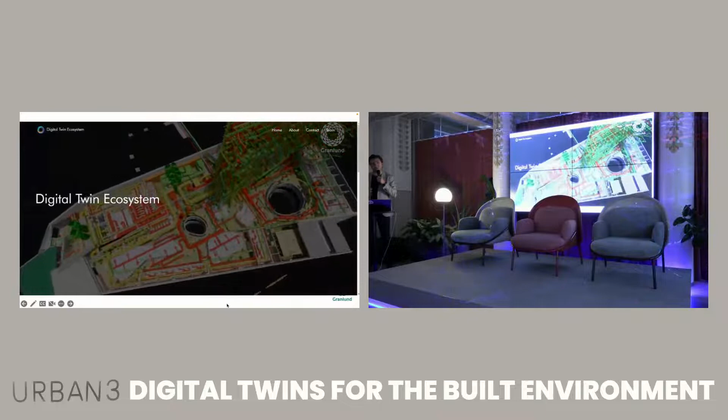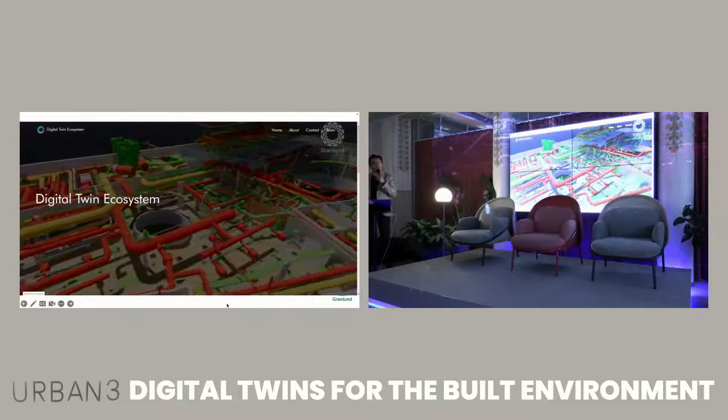I'm going to show you a video. Here we started trying to understand what digital twins are about. The industry is quite complex, so we took an approach to understand what kind of users there are and what kind of digital twins we should develop. For this, we planned different kinds of use cases, and with that we developed different applications that suit different kinds of users. I'm going to show you some of these applications, but try to focus on what the idea is.

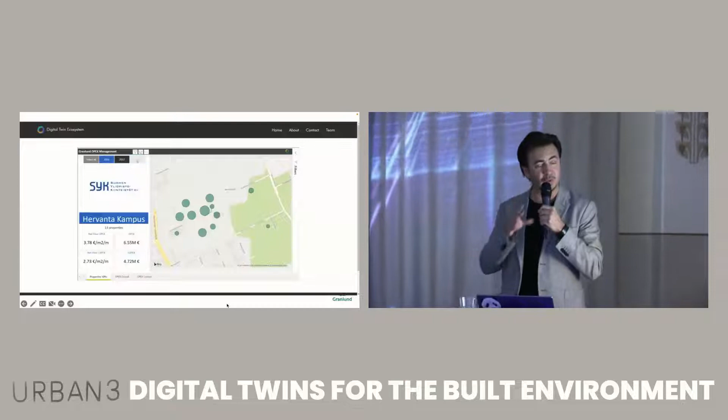I'm going to start with this portfolio benchmarking, and this is to have a big picture of why we are needing digital twins and what kind of digital twins we want to use. This is to have an overall view of the portfolio of a campus, for example Hervanta campus, and we focus especially on operational costs and capital costs. We wanted to understand on a bigger picture what kind of buildings need to reduce those costs, and we compare that to a specific benchmark. This benchmark allowed us to know and understand what is the digital twin we need and why do we want to develop that.

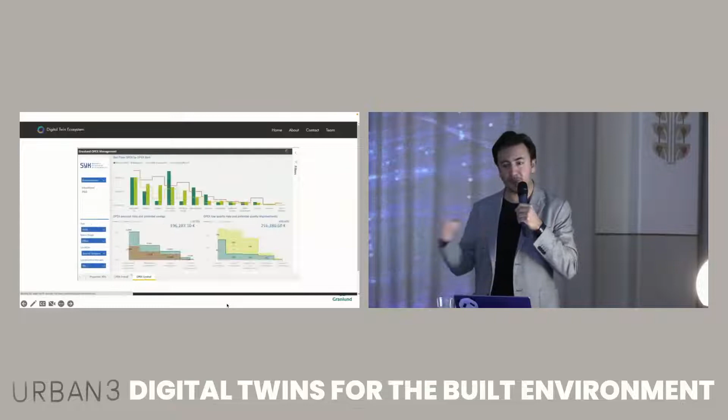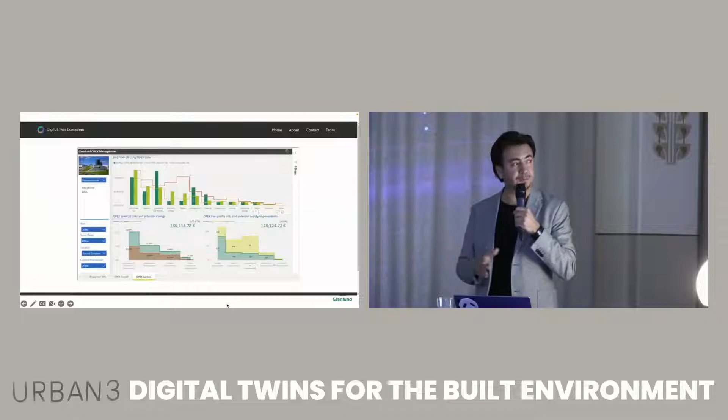Then we went more in detail about the operational costs, and here you can see the different cost items in operational expenses. In this specific project we focused on operations and maintenance, which was the largest cost item compared to the other ones. So this is how we started developing a digital twin that will help improve those operation and maintenance processes, and of course provide some savings for the building owner.

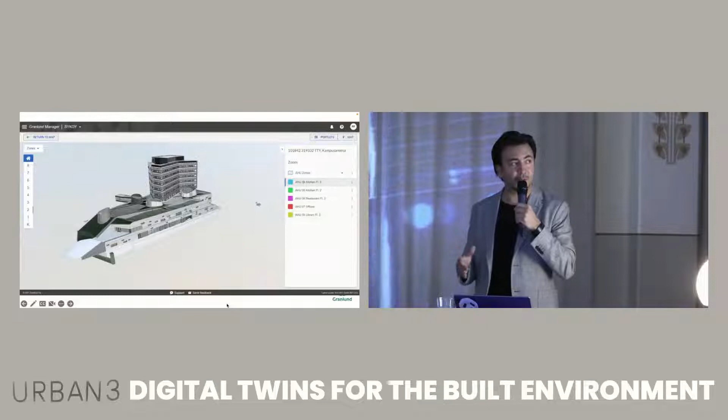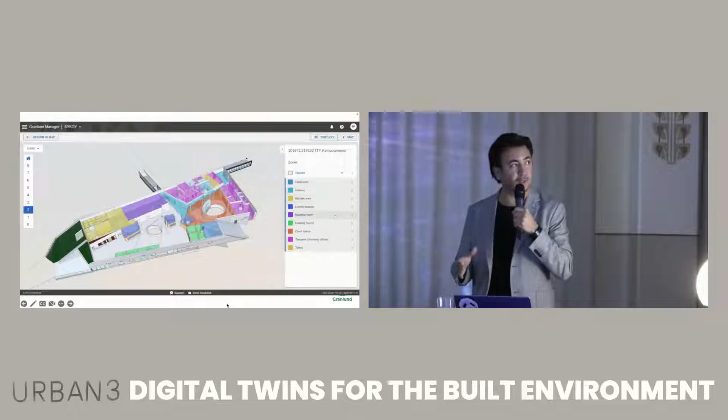Many of you already know we have a platform, Granlund Manager. This is the Granlund Manager Digital Twin that focuses on maintenance. Here we are visualizing the different kinds of spaces. Spaces can be classified by usage, or for instance if there are different cleaning zones, you can classify those spaces like that. We are also able to visualize all the mechanical systems in this building, and we focus on the most critical type of equipment - in this case, the air handling units. Then here you can see, for instance, what is the preventive plan for those air handling units, and also have access to relevant information related to that specific component.

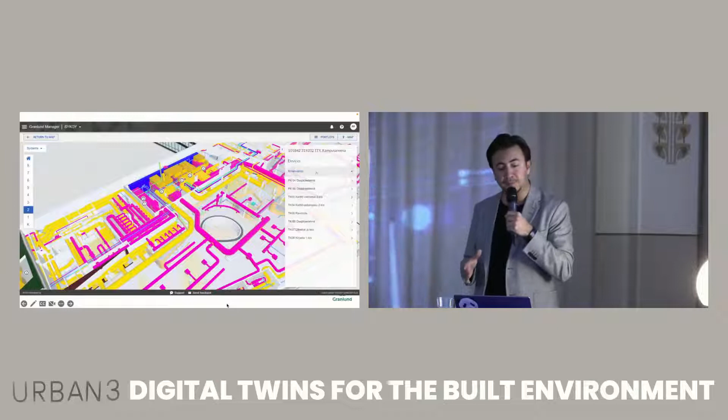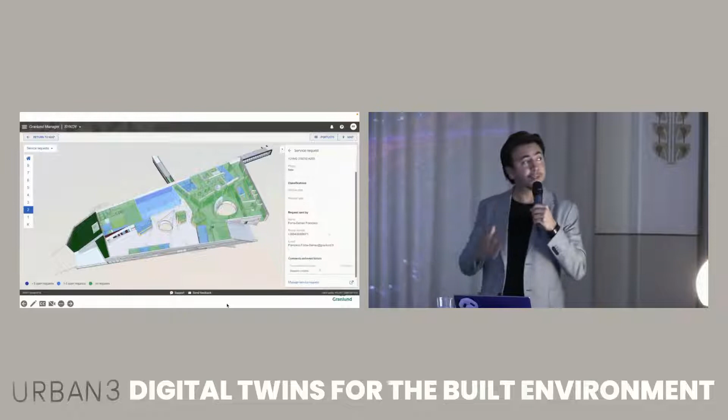One of the requirements of the owner was to understand better how some of these spaces function. So here you can see the digital twin, and here you see what's happening in this space related to the service request.

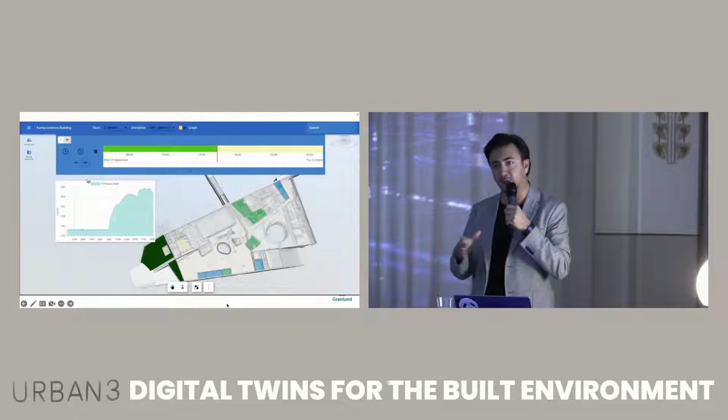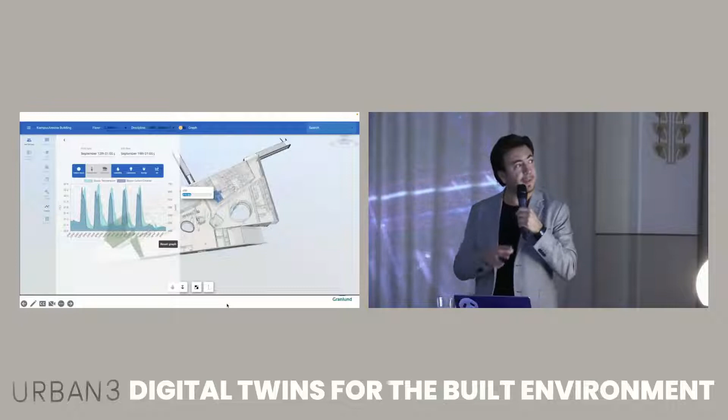To have a more dynamic kind of digital twin, the owner wanted to understand what's happening in these different kinds of spaces. So we developed this animation that shows how, for instance, the CO2 levels are changing over certain periods of time. In an example, you can see at 9 in the morning people start coming to the office. This is the kind of information the owner wants to see - this dynamic information about space usage in the building. And then, of course, the idea is to integrate this with other kinds of information, so we can find correlations between different parameters. We are exploring more in this area, and this is some of the ideas we are trying to do.

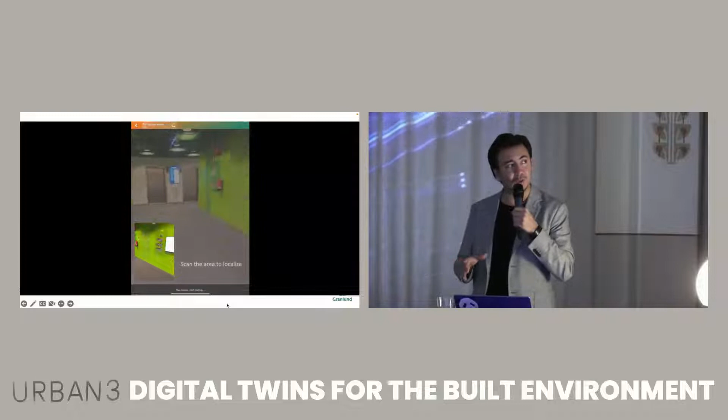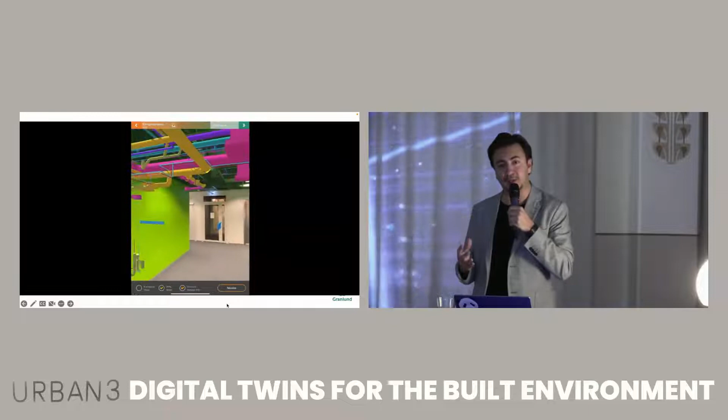We have developed this tool, augmented reality for facility management. This enables the operator to locate themselves in the building and access the model, in this case the HVAC systems. The operator can interact with the model as well, so if you tap on a certain component, you can get information related to that, which could be dynamic, static, or information coming from maintenance.

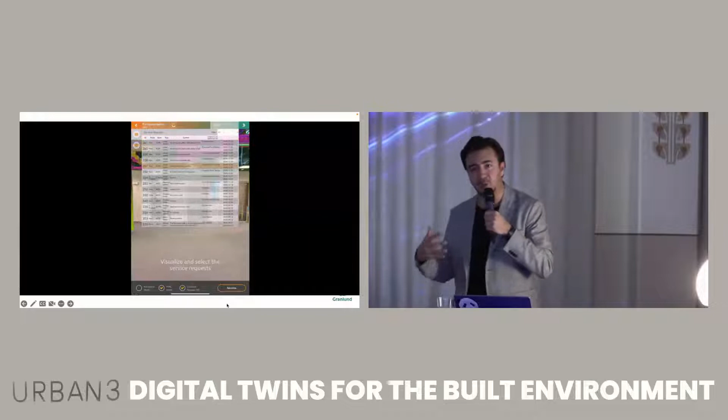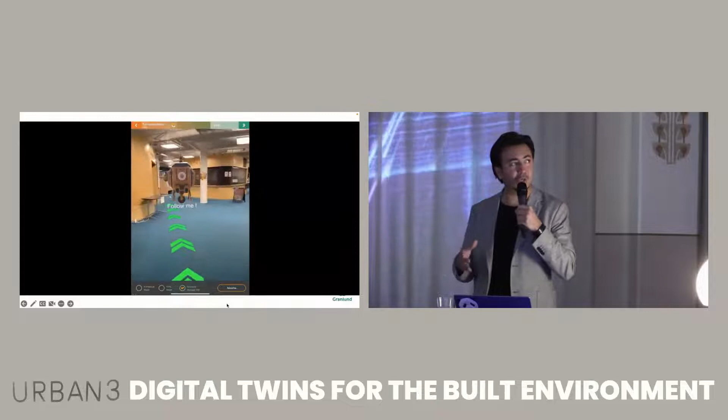One of the ideas we had is to integrate this tool with our Granlund Manager. Here you can see an assistant that helps you navigate and locate yourself in the building where there's a problem in the space. You can use the application to process the request and complete it, and this is something we are working on more in the future.

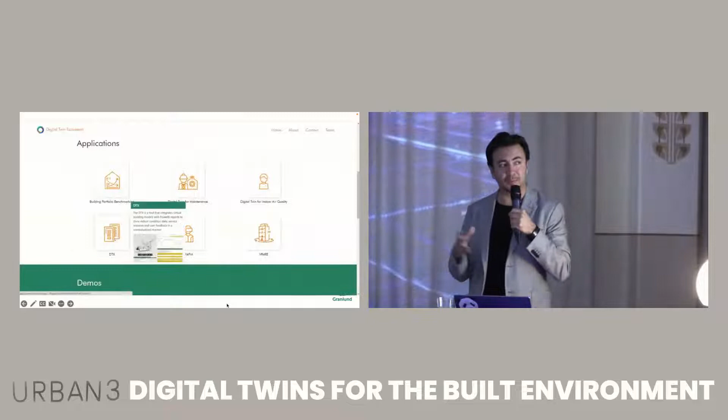We also developed this kind of reporting tool, aimed for someone who is not that familiar with navigating the models, but you can integrate different kinds of information, different sources of information. In this example, we're showing the indoor conditions in the space, so you have the score coming from Granlund metrics, the feedback users have given about that specific space so we can integrate with other smart applications, and you would also know what kind of issues have happened in that space.

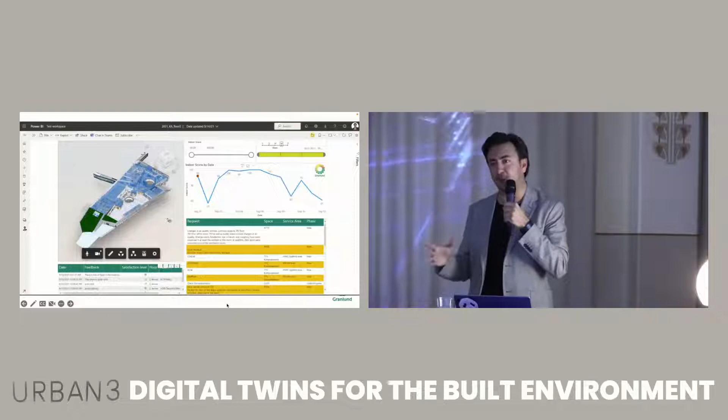This is an example to show that digital twins is a complex topic, and we are developing solutions that fit different kinds of use cases. We participated in a competition last year and were one of the finalists, so we are really into supporting open standards with this application.

Now I'm going to explain more about a use case we did with augmented reality on a city scale level. This is a project we did with Forum Virium. I'm going to play a short video now.

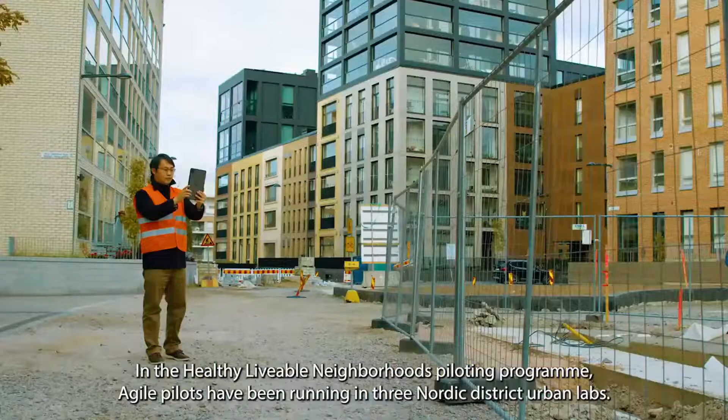Cities are growing and green spaces are becoming more important to ensure the well-being of people and nature. In the Healthy Livable Neighborhoods piloting program, agile pilots have been running in three Nordic district urban labs. The Green Kalasatama mobile application was co-developed and tested together with local residents in the developing district of Kalasatama, Helsinki. We worked very closely with Forum Virium. It was very important to have this kind of co-creation activities and testing, because we received a lot of feedback from users. During this period we were able to improve the application, add new features, and got good results. Green Kalasatama demonstrates an engaging and educative approach in participatory green area planning with the use of augmented reality. For this pilot it was very interesting for us to test the use of augmented reality on a city scale and develop an application that can be fun and educative for residents doing urban planning. The mobile application allows users to place green elements, such as trees and bushes, in their surrounding area in a virtual environment.

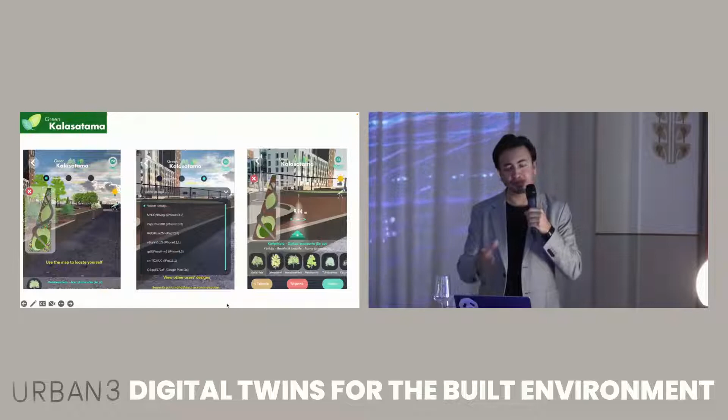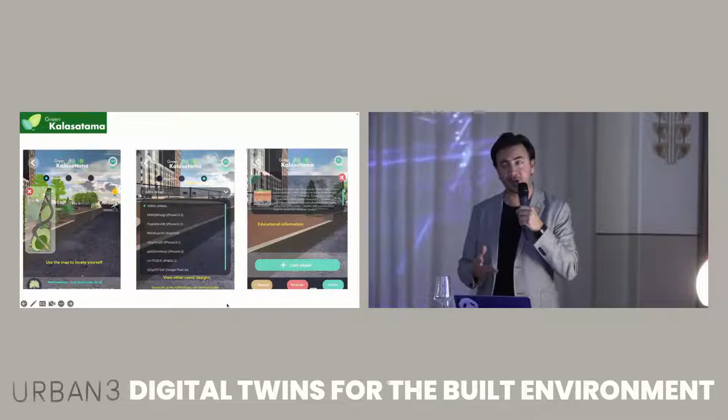You will select your different kind of trees, and these are one of the things we did. You can move around and get more information. We added some educational information because kids seem to really enjoy the application, and they were really good at providing feedback for future development. One key point was that we were able to visualize this information because we get the precise location of what kind of trees, for example, have been selected. But this can be implemented in a different kind of context.

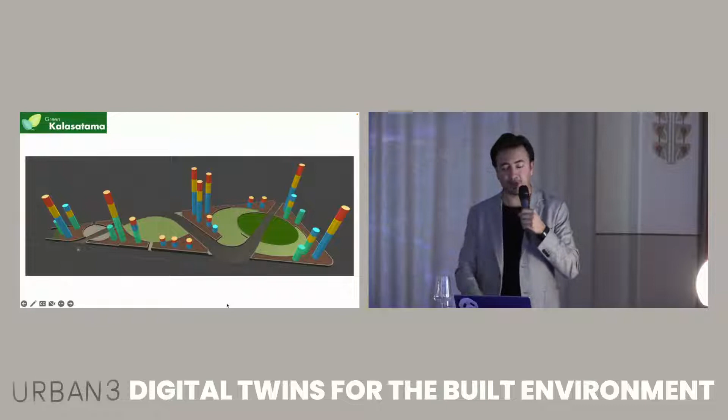Now I'm going to talk about some future ideas. These ideas don't necessarily represent what my company is doing, but I was having a hard time visualizing what this could be, so I used an artificial intelligence engine to help me create these images and try to explain better what we're thinking.

So what I've shown before, a lot we have focused on visualization, on building information models and how to show the information. But one of the things we plan and intend to focus more on is understanding the semantic relationship between different elements, spaces, systems, and components.

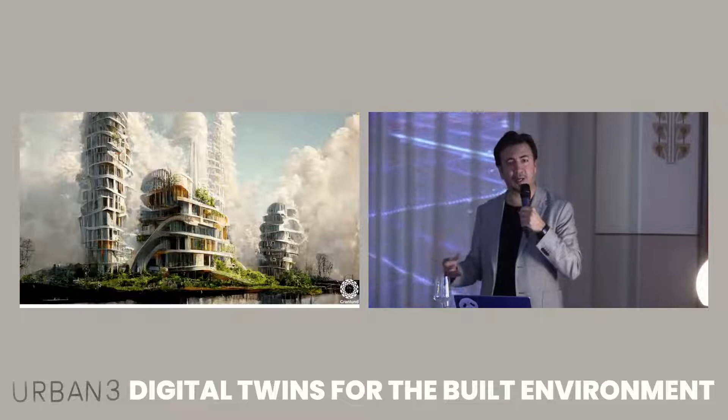Another aspect is the life cycle of the building. We will take into account more and more how buildings have been used and try to bring that information into the design of the buildings, how we can better feed that feedback loop of how a building is operating now and what we can improve for the future. I think life cycle thinking and long-term thinking is going to play a key role as we develop these digital twin solutions.

Just to conclude, I think in the built environment we have a big responsibility on how we plan the built environment for the future. We should try to build a built environment that is less invasive to natural ecosystems, something that's more aligned with what's already there. So we have a big responsibility, and I think we can build a really sustainable and also smart built environment. Yes, thank you.